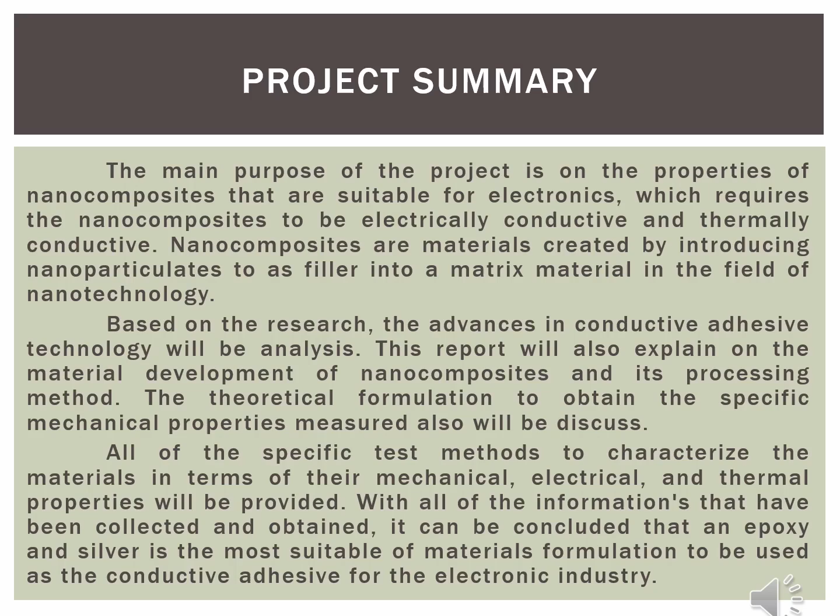Nanocomposites include materials with at least one physical dimension within the nanometer spectrum. Nanocomposite research creates a scalable framework for the creation of certain novel nanomaterials with diverse properties and functionalities.

Electronic adhesives are a central component of electronic components and are commonly used in the production and installation of a wide variety of electronic products. Demand for electronic adhesives is growing exponentially, leading to advancement in electronic devices. This improvement in the properties of nanoparticles is useful in many ways.

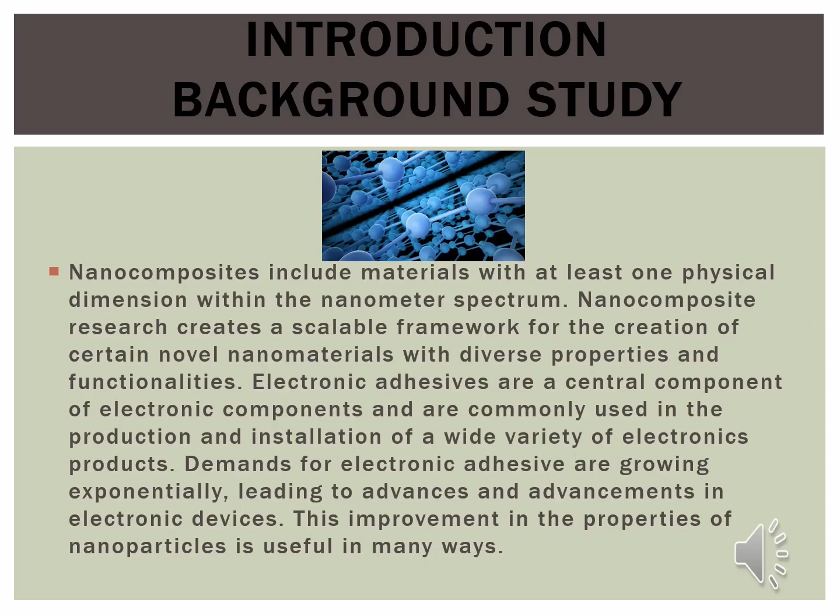Electronic adhesives definitely have their benefits, but they still cannot replace traditional tin soldering in many applications, particularly at high temperature, rendering it ineffective. Low impact strength, low reliability, and low conductivity due to reduction in bond strength generally occur on aging at elevated temperatures and under moist conditions.

Adhesives are organic compounds and have lower thermal conductivity compared to solder interconnect. Most adhesives are non-electrically conductive and must be converted by adding a filler to the base material.

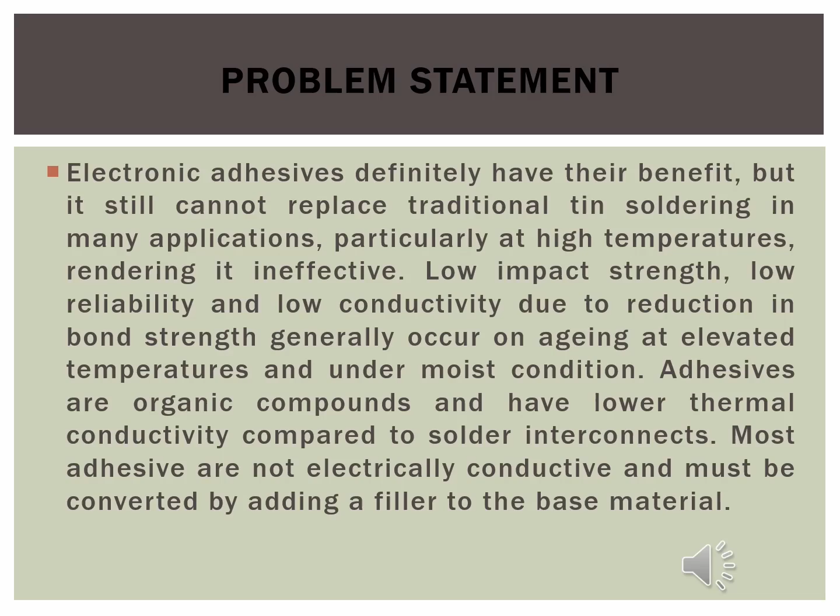The next subtopic is nanocomposite. I will explain the definition and application of nanocomposite. Nanocomposite materials have greatly grown to provide a wide range of structures such as one-dimensional, two-dimensional, three-dimensional, and amorphous materials that produce distinctly different components and combine at the nanometer scale.

Nanocomposites are materials with a nanoscale structure that improve the macroscopic properties of products. The increment of nanostructured materials in recent years has been mainly due to their attractive potential, which shows greatly enhanced mechanical and physical characteristics compared to conventional grain materials.

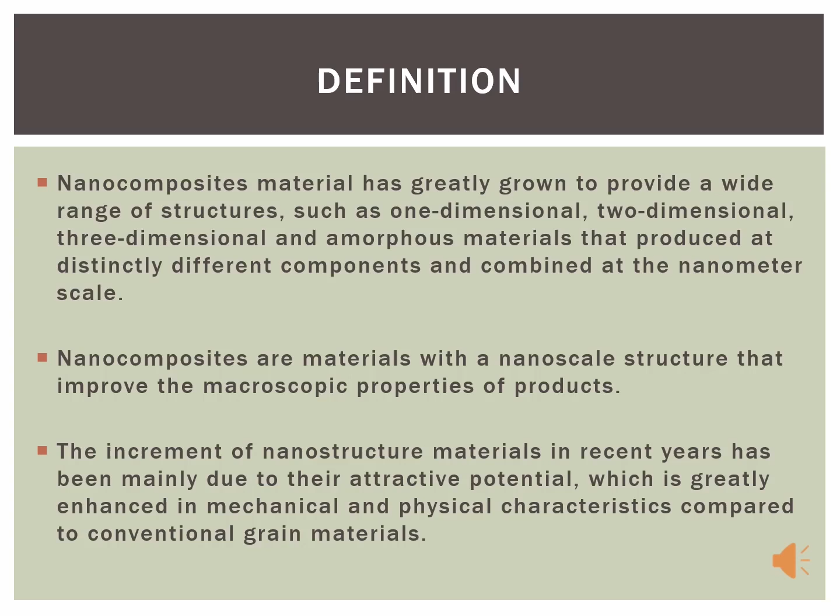Nanocomposite materials can be classified based on the presence or absence of polymeric material in the composite. Polymer-based composites can be classified into polymer ceramic, inorganic polymer, inorganic hybrid, and polymer layered silicate. Nanocomposites in which the composition does not contain any polymers are called non-polymer-based nanocomposites.

Non-polymer-based nanocomposites are also known as inorganic nanocomposites. They can be further classified into metal-based nanocomposite, ceramic-based nanocomposite, and ceramic-ceramic nanocomposite.

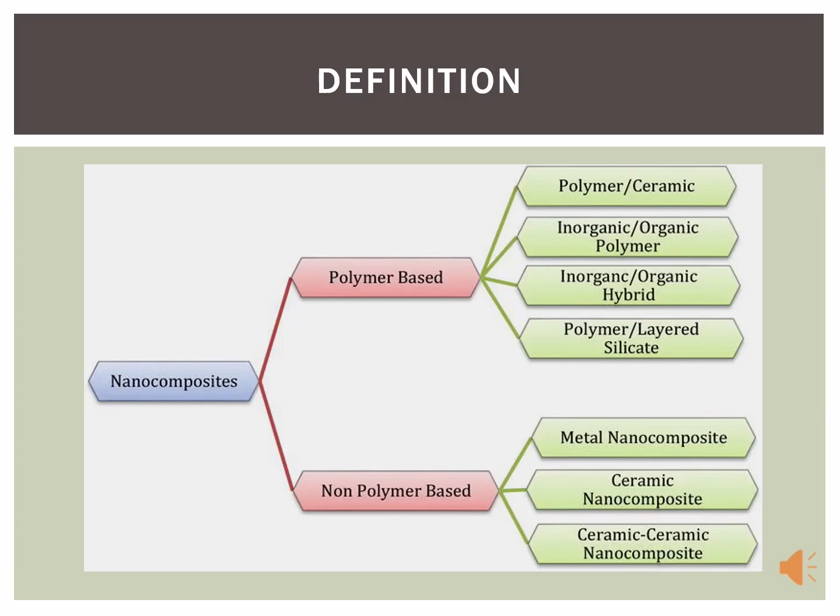Examples of applications that use nanocomposite materials include artificial joint implants for fracture failures, dentistry, electronics and food packaging industry, various vehicle types like engine covers, door covers and timing belt covers, and manufacture and structural repair of damaged oil and gas pipelines. High performance nanocomposites are also used in fuselage sink in aircraft.

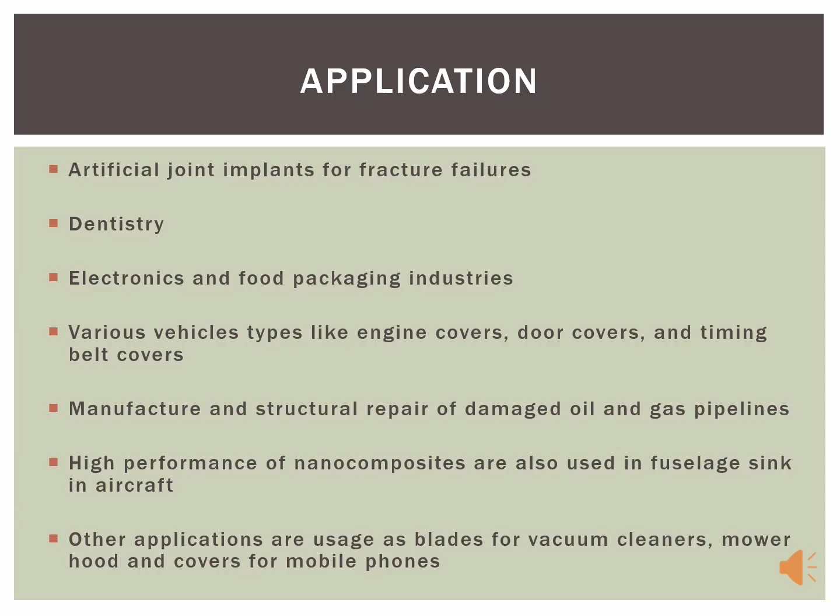Other applications are used as blades for vacuum cleaners, mower hoods, and covers for mobile phones.

Nanocomposites have been growing at a speedy rate, so there are a large number of applications. In the future, worldwide production will increase in the following areas: superior strength fiber and films, UV protection gels, drug delivery systems, new fire retardant materials, anti-corrosion barrier coatings, lubricants, and stretch paint.

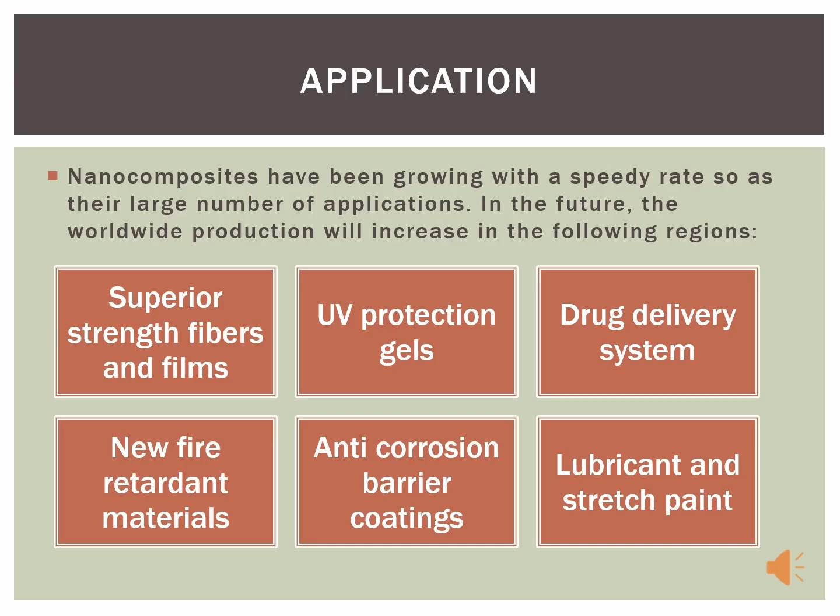Next is materials development. The synthesization of silver epoxy nanocomposites plays an important role in manufacturing of nanocomposites.

The shape and size of nanoparticles need to be determined as it may affect the thermal and electrical properties of that composite. Meanwhile, the optimum content of the filler is crucial in maintaining low density and high mechanical properties provided by the polymer matrix.

The thermal conductivity increases with silver content, and the influence of filler aspect ratio is significant. According to Hostavan et al., the interfacial interaction between host matrix and nanofillers is a parameter that must be taken into consideration in order to achieve desired thermal and mechanical properties.

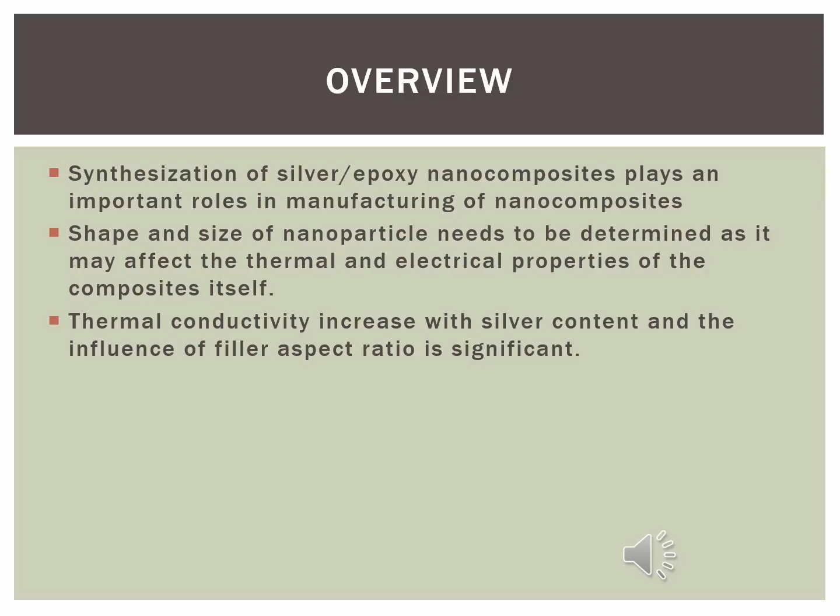In situ technique has been used as a processing technique for the preparation of epoxy silver nanocomposites. This technique involves two main steps: the preparation of silver imidazole, and the preparation of epoxy silver nanocomposite itself.

The silver imidazole complex was synthesized using silver acetate and 2-ethyl-4-methyl imidazole, known as 2E4MZ, which acts as a reducing agent for silver. Imidazole was immediately released from the complex and could initiate the curing reaction of epoxy resin.

Silver acetate was added to a CH2Cl2 solution of 2E4MZ, and the mixture was stirred for 2 hours until all silver acetate solid disappeared. The solvent was condensed to approximately 2 ml, then ether was added to give white precipitates, which were filtered off and collected. The product was obtained as a white solid after recrystallization by dichloromethane diethyl ether, with a yield of 85%.

Next is the preparation of silver epoxy nanocomposites. Silver acetate and epoxy resin with the fraction ratio were distributed in acetone. Since silver acetate does not dissolve in acetone and is only in suspension, an acetone solution of 2E4MZ was slowly injected into the suspended mixture to dissolve it, and after stirring for 30 minutes, the solvent was evaporated.

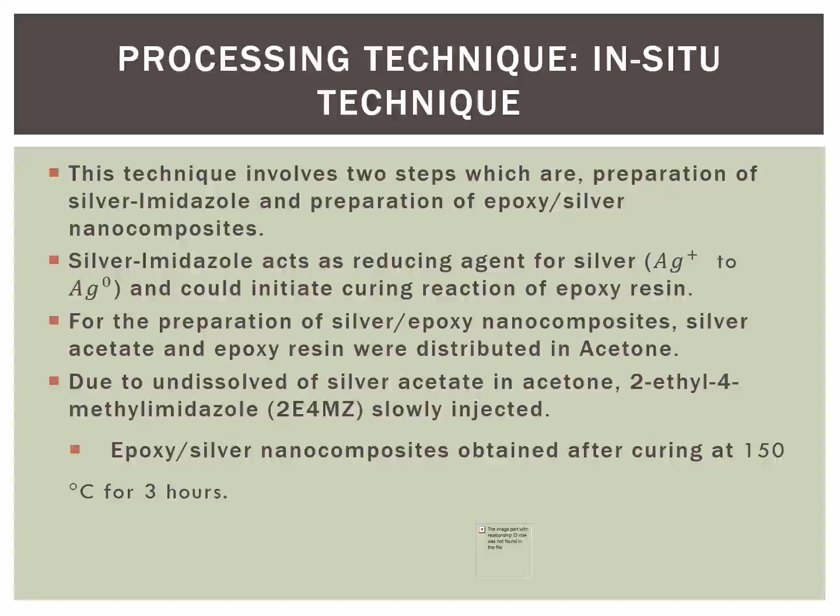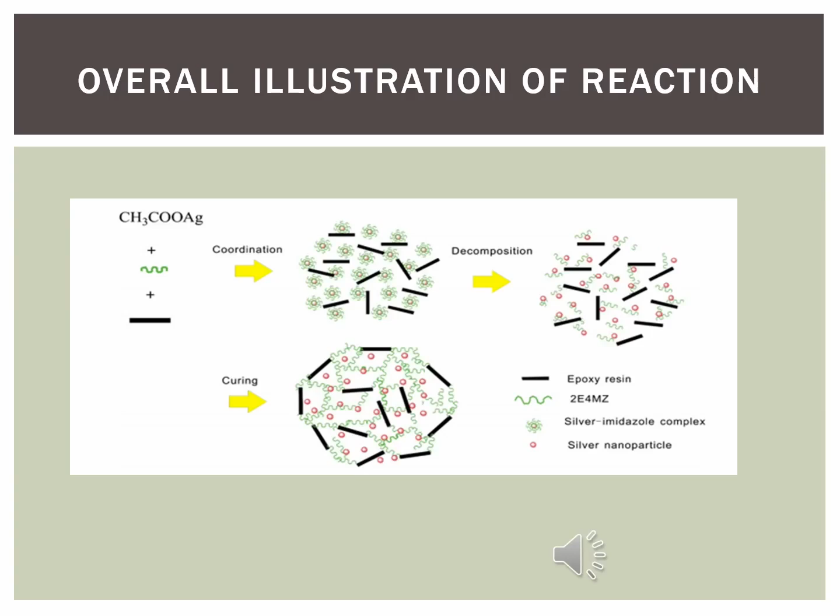This figure shows the overall process of the reaction for producing silver epoxy nanocomposites.

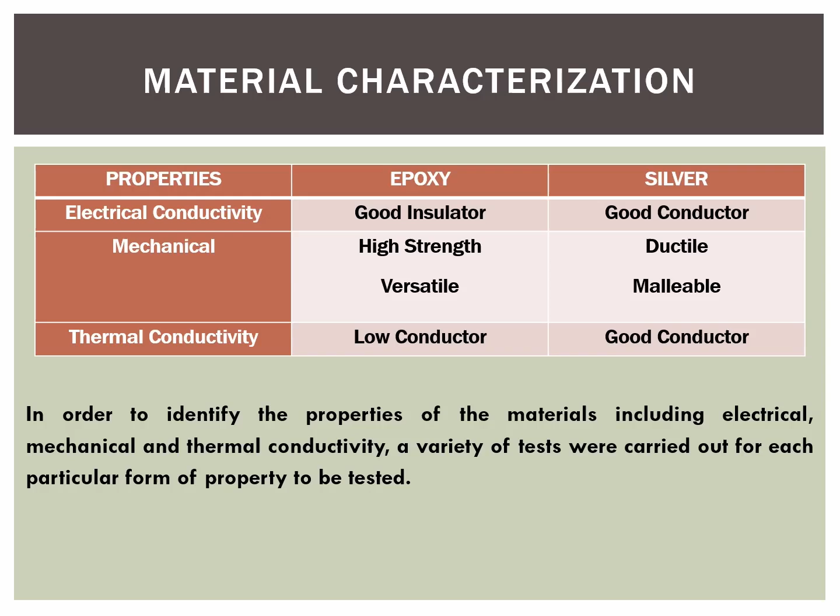To identify the properties of the material, including electrical, mechanical, and thermal conductivity, a variety of tests were carried out using specific testing methods. For electrical conductivity testing, first we have surface tracking, which is the propagation of an electrically conductive path because of the breakdown of the insulation material along the surface of an electrical insulator.

Second, dielectric strength is the maximum electric field strength that an insulating material, a dielectric, can withstand without experiencing a failure of its insulation properties or breakdown. Finally, corona discharge is an electrical discharge brought about by the ionization of a fluid surrounding a conductor that is electrically energized.

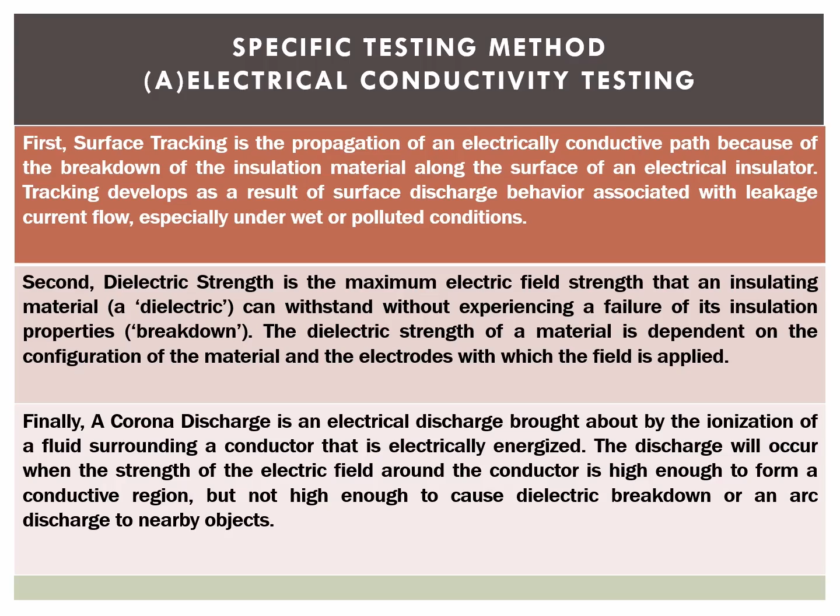For mechanical testing, also known as destructive testing, this reveals the properties of a material under dynamic or static force, designed to ensure that materials are suitable for their intended application. Mechanical testing includes methods such as tensile strength, compression strength, impact resistance, fracture, and fatigue testing.

Element tensile testing labs provide conditions for exposing material to a static or slowly applied force, determining their ultimate tensile strength. Tensile testing is a destructive mechanical testing method that subjects a sample to uniaxial tension until failure.

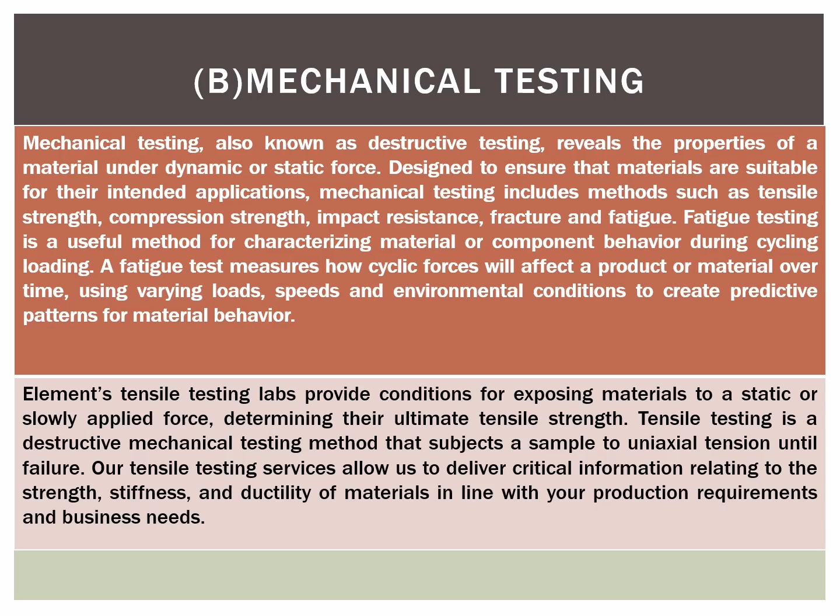For thermal conductivity testing, the steady-state technique records a measurement when the tested material's thermal state reaches complete equilibrium. For the non-steady state, or transient technique, measurements are recorded during the heating process. This method determines thermal conductivity properties by means of a transient sensor.

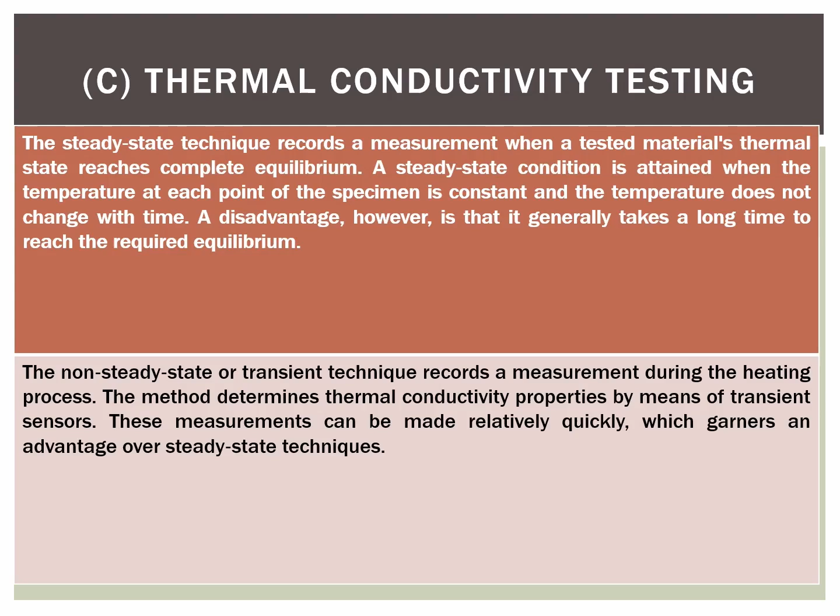To determine the mechanical properties of the material, tensile test is the best selection. A tensile test, also known as a tension test, is one of the most fundamental and common types of mechanical testing.

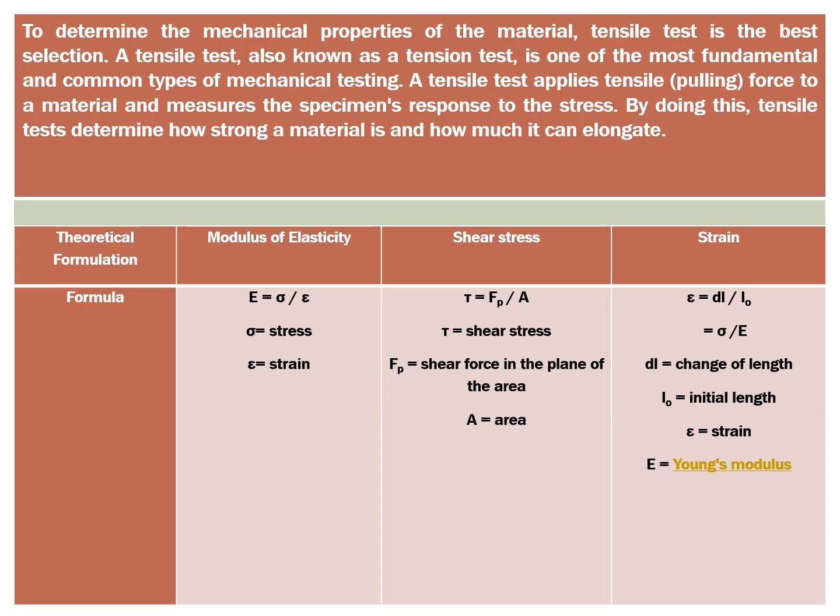This is the theoretical formulation for modulus of elasticity, shear stress, and strain.

Next is the conclusion. Epoxy resin is the most appropriate adhesive to be used in the electronic industry. Epoxy is one of the glycidyl groups that can be used for the creation of useful materials.

Besides that, epoxy resin is also one of the most used polymers in the manufacturing field. With the combination of specific characteristics such as thermal conductivity, dielectric constant, ductility, scratch resistance and modulus, toughness and wear properties, impact efficiency and compressive strength, a composite with polymer matrix (PMC) can be displayed.

Analysis shows that the addition of epoxy and MDA plays a role in controlling the size and dispersion of Cu nanoparticles. Compared to pure unfilled epoxy or MDA, a small decrease in thermal stability is observed for the Cu epoxy or MDA composite. Lastly, the problems and weaknesses of epoxy and silver as a metallic filler used in the electronic industry were finally solved in this research.